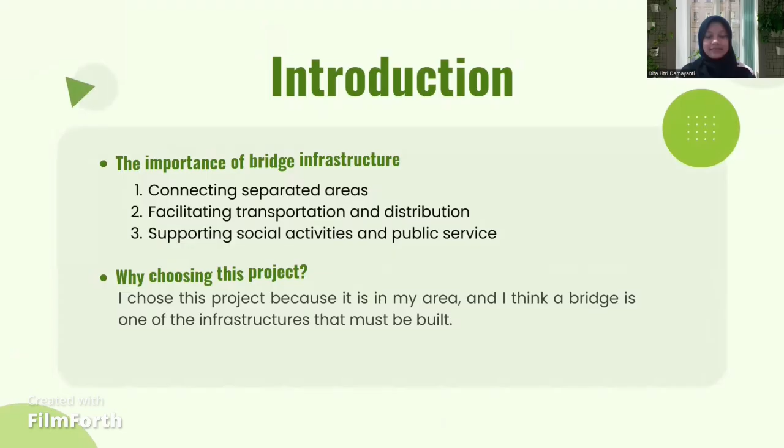Bridge infrastructure plays a vital role in our daily lives. It connects places that are divided by rivers, roads, or train tracks, making transportation faster, safer, and more efficient. In the case of the Kalimalang Peruri Bridge, it connects the industrial zone owned by Peruri with surrounding roads.

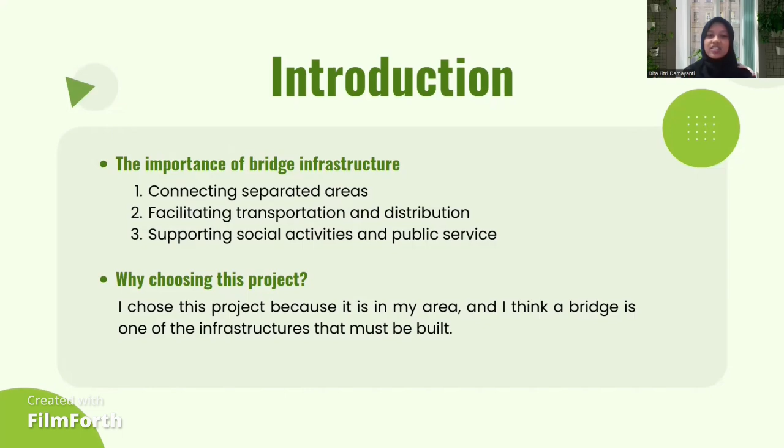And the residential area. This helps not only Peruri's operation, but also the local community's access to work, school, and market. That's why I chose this bridge as the focus of my presentation. It's also near my area, and I think a bridge is one of the infrastructures that must be built.

The name of the project is Kalimalang Peruri Bridge. It is located in Parungmulya Village, Ciampel District, Karawang Regency, West Java, Indonesia.

The main purpose of the Kalimalang Peruri Bridge is to improve accessibility between the Peruri industrial area and nearby communities. Before the bridge was built, the existing access was limited and not suitable for heavy vehicles or high traffic volume.

Although this is not a national level mega project, its impact is very local and significant. It improved connectivity between the industrial zone and public roads, and enabled faster and safer logistics distribution from the Peruri factory to regional and national routes.

It also enhanced access for residents to school, healthcare, and markets, supported local economic activities including small business and labor mobility, and contributed to long-term regional planning and infrastructure integration.

Now, let's move to the technical details. The Kalimalang Peruri Bridge was built using reinforced concrete with a simple girder bridge design. The main material, as I said, is reinforced concrete. The bridge length is 40 meters.

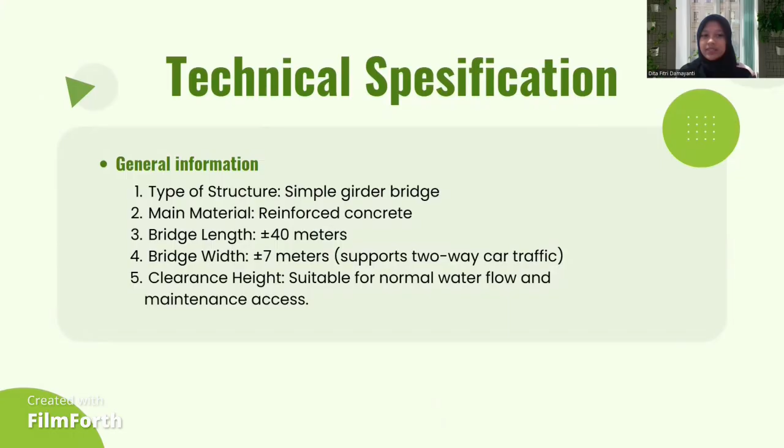The bridge width is 7 meters, supporting two-way car traffic. The clearance height is suitable for normal water flow and maintenance access.

The foundation type is pile foundation, designed to withstand heavy vehicle loads from industrial operation, with strong soil support to ensure long-term stability. The drainage system is installed on both sides to prevent water accumulation on the bridge surface.

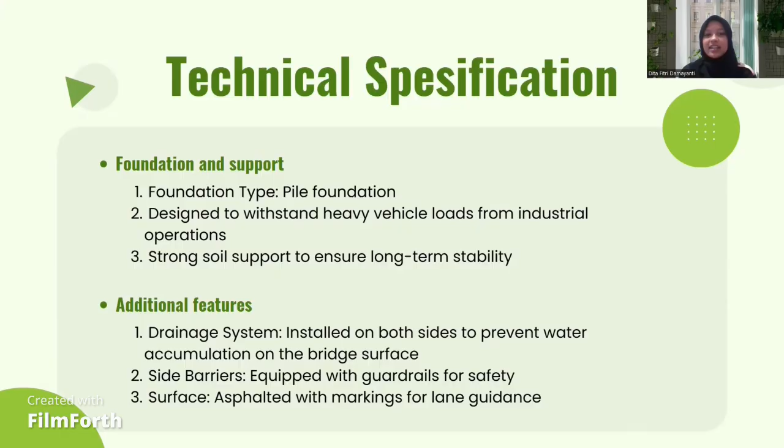The side barriers are equipped with guardrails for safety, and the surface is asphalt with markings for lane guidance.

The construction process was completed in several stages over 6 to 8 months. The equipment used included cranes, concrete mixer trucks, concrete pumps, pile driving machines, and excavators.

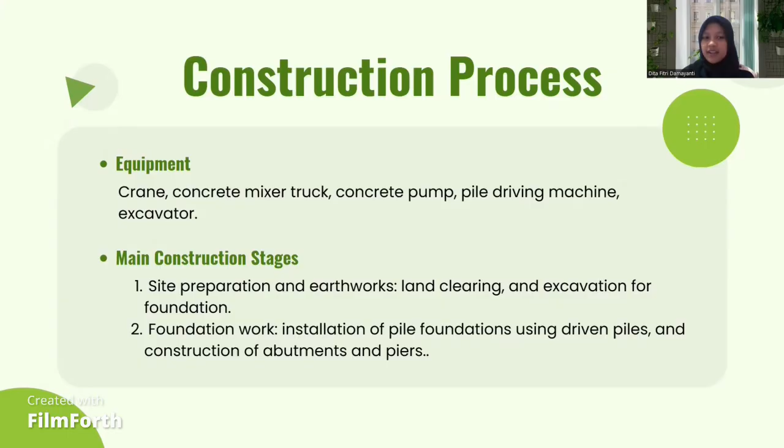The main construction stage began with site preparation and earthworks, land clearing, and excavation for the foundation. The foundation work included installing pile foundations using driven piles and construction of abutments and piers.

Next is the superstructure installation: placement of precast concrete girders, deck slab formwork and reinforcement, and concrete casting of the deck. The finishing work included asphalt surfacing, installation of guardrails, lane markings, drainage, and landscaping and cleaning.

One challenge was ensuring that the Kalimalang Canal could still flow freely during construction. Another issue was limited vehicle access due to the location. Despite that, the project stayed on schedule and was completed successfully.

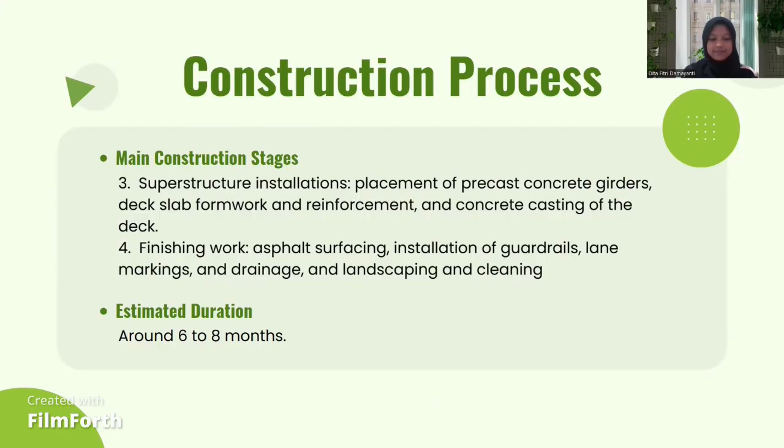The main owner of this project is the Karawang Regency government, under the supervision of the Public Works and Spatial Planning Department, Dinas PUPR.

An important stakeholder is Peruri, the state-owned money printing company, which operates in the area. Although not the owner, Peruri is a key beneficiary because the bridge directly supports its operations and employees.

Local residents are also stakeholders, as the bridge gives them much better access to essential services. Let's look at the impact of the project.

Environmentally, the effect was minimal because the bridge was built over an existing canal. There was no major alteration to the landscape or water system. The project had minimal impact because of this existing canal, with no major alteration to the waterway.

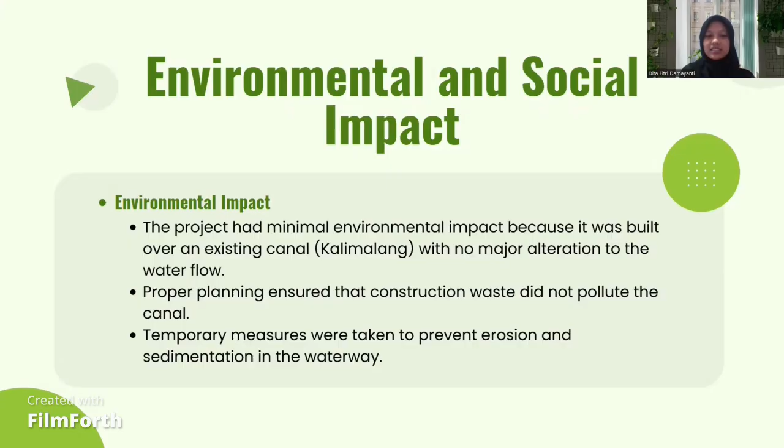Proper planning ensured that construction waste did not pollute the canal. Temporary measures were taken to prevent erosion and sedimentation in the waterway.

As for the social impact, the bridge significantly improved public access between residential areas and the industrial zones. It reduced travel time and made daily commuting safer for both factory workers and local residents.

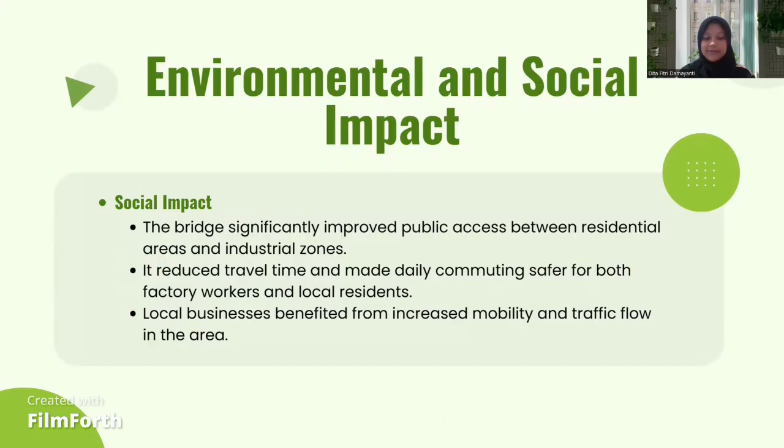Local businesses benefited from increased mobility and traffic flow in the area. The project also included a public information campaign to inform the community and reduce disruption during construction.

The bridge was officially completed and opened in 2023. Since then, it has been fully operating.

The bridge is actively used by Peruri employees and factory vehicles, local residents commuting between villages, and transport vehicles connecting to main roads.

It has improved traffic flow and reduced congestion in the area, especially during peak hours. The bridge surface, drainage, and guardrails are functioning well, with no major issues reported since opening.

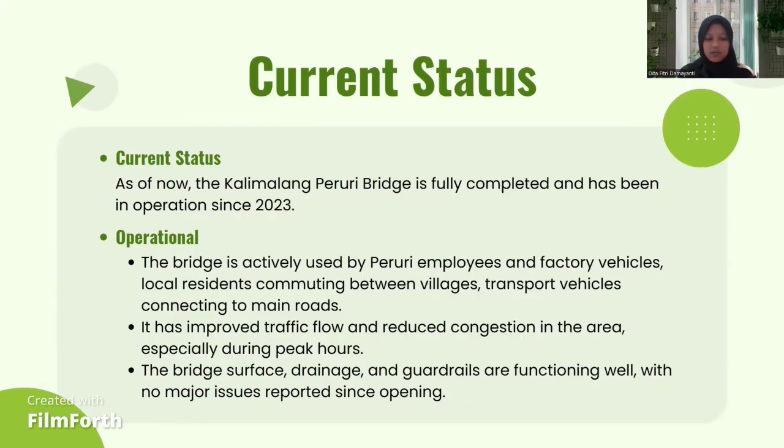In my opinion, the Kalimalang Peruri Bridge is a successful and impactful infrastructure project. It directly addresses the needs of both industrial logistics and community access in the Ciampel-Parungmulya area. Although it may seem like a small bridge, its role is strategic and essential for daily mobility.

The bridge plays a vital role in supporting economic growth, social activities, and transportation efficiency in Karawang. It also demonstrates how targeted infrastructure can bring large-scale benefits to both industry and society. With proper maintenance, this bridge will continue to serve the community for many years.